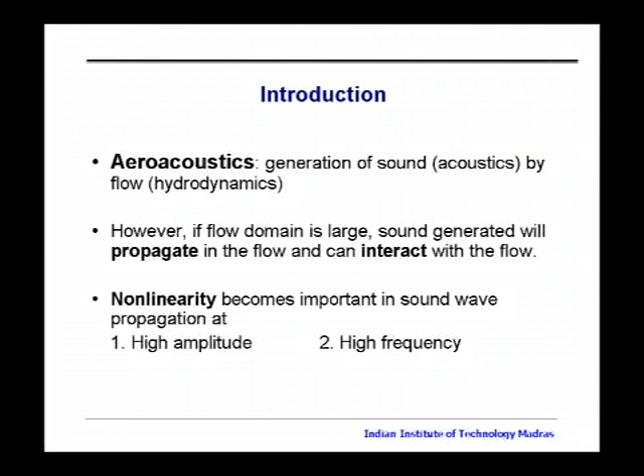Aeroacoustics is the generation of sound by flow hydrodynamics. But if the flow domain is large, and there are problems in which you are interested in what happens in large domains, a sound generated will propagate in the flow. And if there is a flow, it can interact with the flow. Examples of that would be a CD nozzle, or a sonic boom where sound propagates over a very large distance. And nonlinearity becomes important if the sound propagation is happening at high amplitudes and high frequencies.

And my introduction to this phenomenon was somewhat circumstantial. Day one at my graduate school, I learned that you have to hit the ground running, and I was given these microphones, and I learned that they are awfully expensive, much more than my stipend. And day two, I measured these things. I didn't know much about acoustics, and I thought they would look like sine waves, but I got some things which were quite far from sine waves.

And I thought, oh my God, all my assistantship is going to be taken by my professor to replace these microphones. But then I eventually learned that this was really okay, and this was called nonlinear distortion. But I was too busy in graduate school to do anything with it. And so eventually, some 15, 20 years later, I'm revisiting the problem.

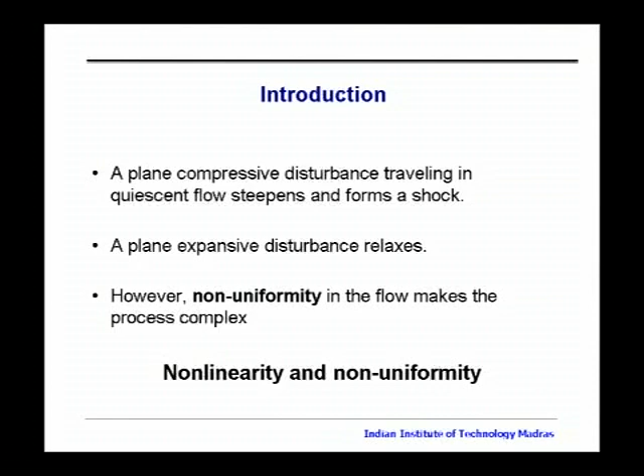So we all know from classical papers that a plane compressive disturbance traveling in a quiescent flow will steepen and form a shock. A plane expansive disturbance would relax. However, there can be non-uniformity in the flow, and this can make the process complex. And so there is this combination of nonlinearity and non-uniformity, and this can make the subject complicated.

So the goals here are to study analytically the nonlinear wave propagation in a general non-uniform flow, and when and where can a compression wave steepen to form into a shock? That's one question I want to ask. And would an expansive disturbance always relax, or would it reach some other state like attaining a permanent form and so on and so forth?

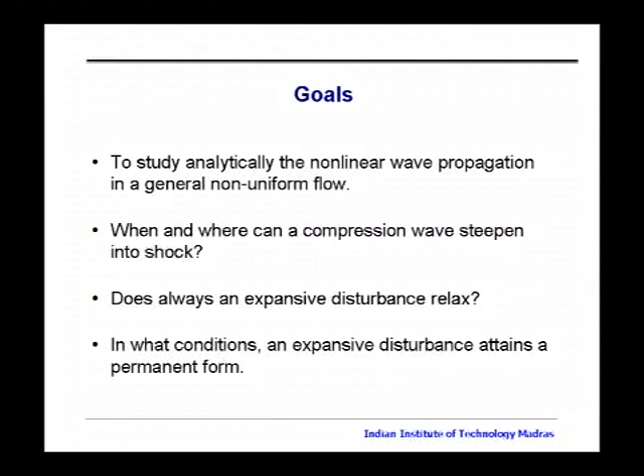Let's just quickly list some of the applications. I got into it because of rocket nozzles and flow in CD nozzles. Other interesting examples are large gas transport systems where you have pipelines carrying gas over kilometers, and you sometimes have oscillations set up because of valves being closed and opened. These pipelines are maintained at very high pressures, so you can actually get high amplitudes, and this can propagate down and become a shock because there are kilometers of pipeline.

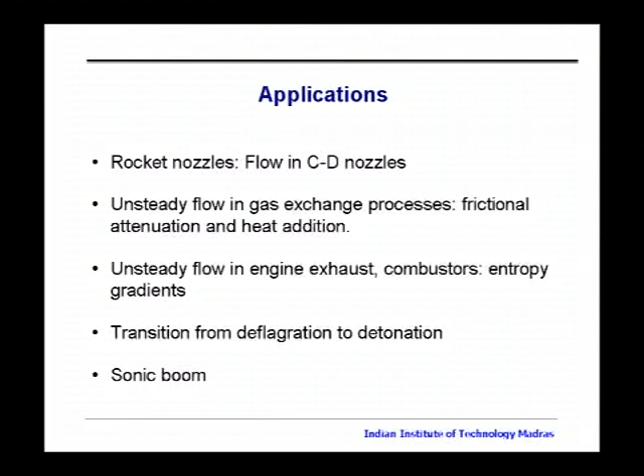And there is, of course, unsteady flow in engine exhaust and combustors, and you can look at transition from deflagration to detonation. Of course, there's the sonic boom which aeroacoustic people are very interested in. So this is indeed a well-posed problem, and someone was saying that Ffowcs Williams likes well-posed problems. But I didn't do the well-posing. It was people like Whitham and Crighton who well-posed the problem.

It's only the Euler equation, a generalized Euler equation where you can think about changes in area or some other inhomogeneities. It's a hyperbolic system, and you can write this equation in this generalized form where u_i is a flow variable, a_ij could in general be a function of u_j, and b_i is a function of u_j and x.

And we all know from classical fluid mechanics that the determinant of a_ij minus c times delta_ij would give the characteristic velocities, which would be u plus a, u minus a, and u in a classical fluid mechanics sense. And b_i could represent things like the effect of duct area variation on the continuity equation, or non-uniform Mach number, or a frictional term in the momentum equation, or sometimes heat addition in the energy equation, and so on.

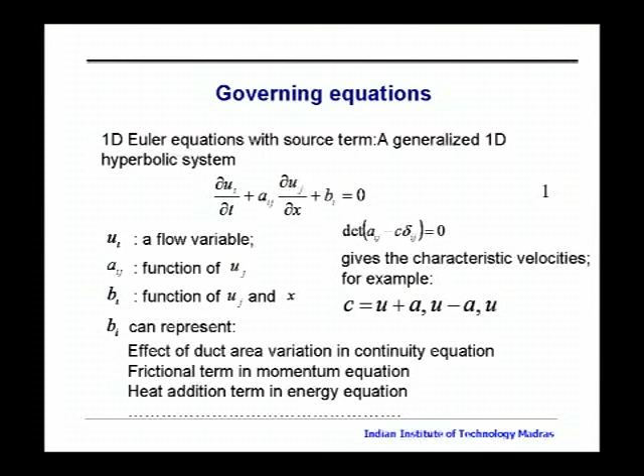So now Whitham and Crighton, they have worked on this problem, but they have done the problem when they had a quiescent or a uniform flow downstream of the wave, which will actually make ui equal to constant, and bi, which is a function of uj, is equal to 0. So then the equation can be solved quite nicely and elegantly, and it is there in some of the papers by Whitham in the 1950s, and there in his textbook, really elegant stuff. But things get messy when bi has to be taken into account when ui is there.

Just some more definitions so that I can explain my talk better. I call a base flow a given steady flow, and in the present work, base flow is the steady state solution of the governing equation. So just the unsteady term disappears, and that's the base flow. Disturbance is at any point in the base flow, if I perturb the flow variable, that's disturbance.

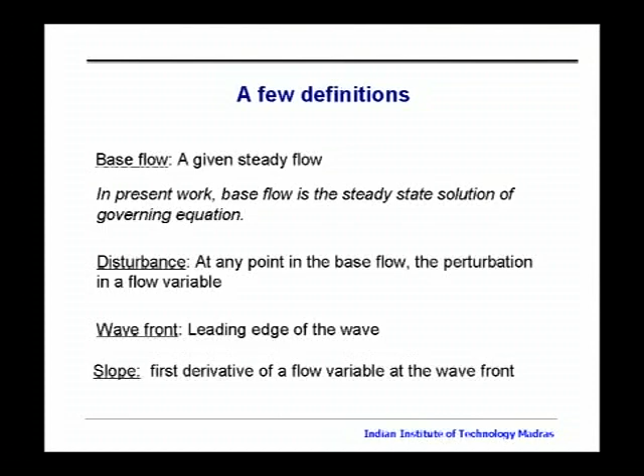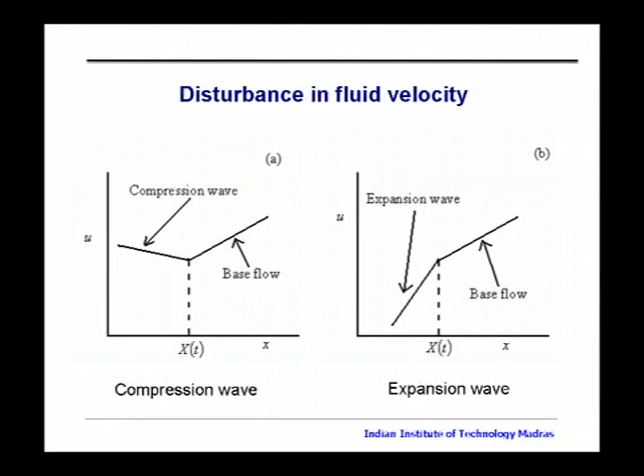Wave front is the leading edge of the wave, and slope is the first derivative of the flow variable at the wave front. So if I have a general flow where I have a base flow whose slope is like this, and then I perturb the slope, first derivative, a little bit, this is how a compression wave would look if I'm looking at a right-running wave, and the expansion wave for a right-running wave would look opposite. It's coming down. So this is just a schematic representation.

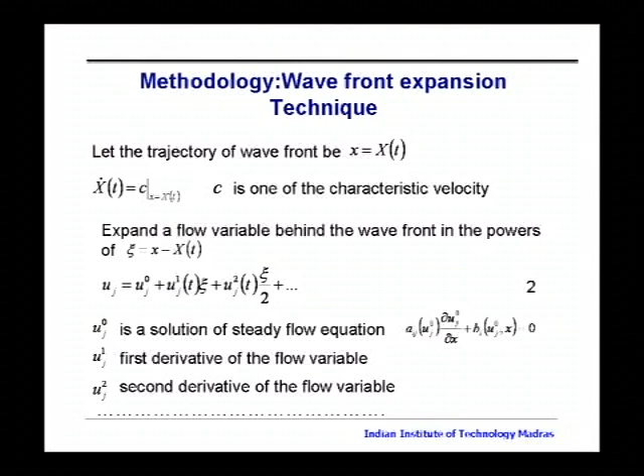So this is like a Taylor series here, and uj0 is a solution of the steady flow equation, which is this. The unsteady term here is missing. uj1 is the first derivative of the flow variable, uj2 is the second derivative of the flow variable, and so on and so forth. So there's a way to look at the derivatives. And now, similarly, we can expand the terms in the equation, aij, this tensor, and bi, in terms of the distance xi from the wavefront.

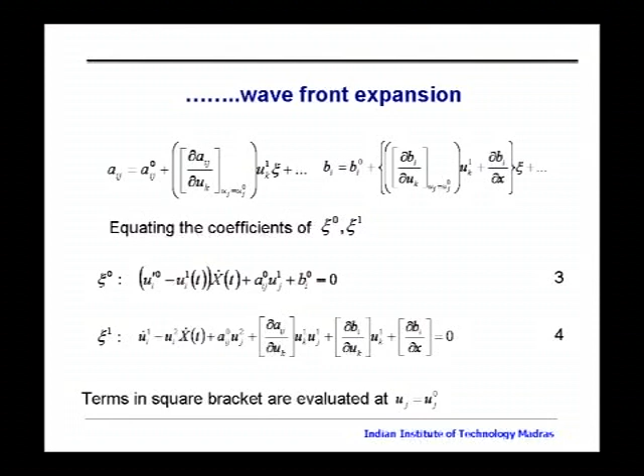And then what we do is to look at the coefficients of xi power 0 and xi power 1, and then you can write these equations. If you write this in expanded form, these equations take long lines, but in tensor form they become sleek and elegant. Now, terms in square brackets mean they're evaluated at the wavefront. So we can write equations like that for xi power 2 and xi power 3 and so on and so forth. And the question is how to solve for the derivatives.

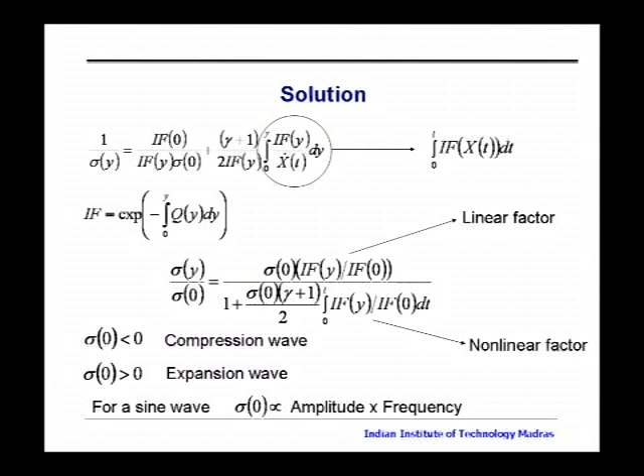So having got the solution, take a look at it with the linear theory one more time. I of y depends on base flow, and sigma y by sigma naught equals I of y by I of naught. This is only when the linear effect is concerned, and these are the solutions in linear acoustics, like ray theory of acoustics. That means the scaling is the same for both compression and expansion waves, and you can work out the expression for I of y. For example, in a variable area duct, it goes like 1 over square root of A of y.

So now we make some definitions. We call the base flow a diverging field if I of y is a decreasing function, and a converging field if I of y is an increasing function. This is just to keep the discussion simple. In a converging field, we can imagine a cone where a disturbance comes through and strengthens, and we can also look at a cone which is opening out, diverging, where a disturbance will decay down.

So based on this intuitive feeling, when I of y is decreasing, that's when attenuation or decay will happen. That will be called a diverging field. And when I of y is increasing, the wave will strengthen and the slope will increase, and it's called a converging field. This is my own definition.

Looking at this expression one more time, we can see that the presence of the integral shows there is a history effect of nonlinearity, which is something you would expect in a nonlinear system. The nonlinearity combines with the linear scaling and makes the process more complex compared to the classical linear acoustic ray theory.

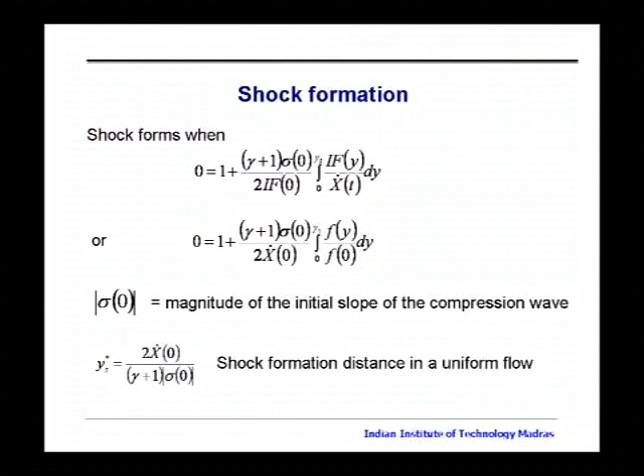And here you can see that I of y is the integration factor divided by x dot, which is the velocity of the wavefront. So we can call I of y divided by x dot as f of y, which is a more appropriate function. I will explain things in terms of that. Now, when does a shock form? I had an expression for sigma, and when the denominator disappears, it blows up.

So that's this equation which I have written, or alternately, you can write it in terms of f as the second equation, and everything is linked to the magnitude of the initial slope of the compression wave. An expansion wave cannot form a shock. Now for comparison purposes, we will look at a classical case where you have a straight duct and a shock forms in a uniform flow.

Then you can integrate this; f of y is the same as f0, so you can get y star, the shock formation distance in a uniform flow, as 2 x dot over gamma plus 1 sigma naught. This is the formula which is in all the old gas dynamics textbooks.

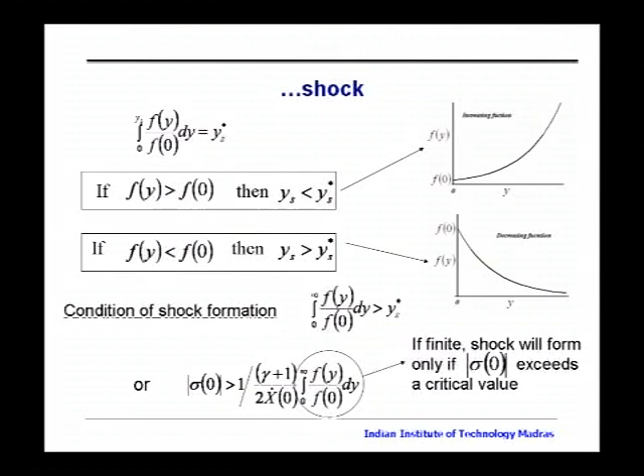So now we have this expression for a general case: the integral from 0 to y of f of y over f0 dy is y star. This gives an implicit equation for the formation of a shock, which can easily be worked out. Now, we look at two kinds of f of y: where f of y is increasing or f of y is decreasing.

When f of y is increasing, then it will turn out that from this we can show that if f of y is greater than f of 0 (actually it's enough if the average value is greater), then ys is less than ys star. This means shock formation will be early, or you would end up favoring the shock formation compared to the case when you have a straight duct with constant properties. Whereas when you have a decreasing function f of y, then the shock formation would be delayed, or ys is greater than ys star.

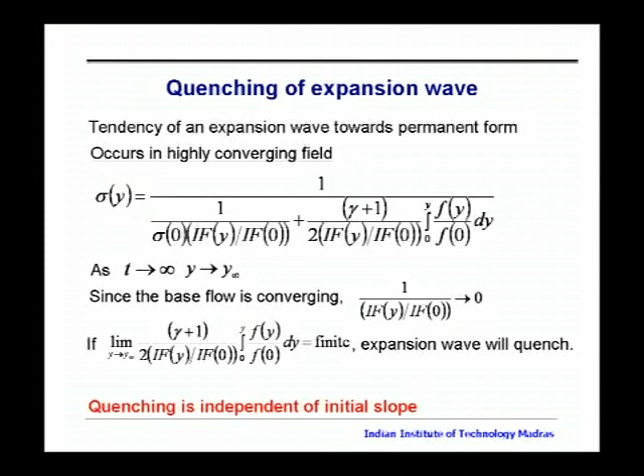Now, you can also get a condition for shock formation, that is, if you let the flow go to infinity, hypothetically, even then the shock forms. So you can derive this expression, which says that a compressive disturbance should always have a value greater than this simple integral written here. So you have to have the sigma exceed a critical value. Only then shock will form.

Okay. The other interesting thing, which is not much talked about, is quenching of an expansion wave, which is a tendency of an expansion wave to move towards a permanent form, and this occurs in a highly converging field. I have rewritten the same expression which I had. If I have a highly converging field where this 1 over I of y tends to 0, so that this first term goes to 0, then we can take a look at the second expression, and it is possible that this limit is finite. Then your expansion waves, as they approach this limit, can reach a constant strength. This phenomenon is defined as quenching, and it should happen independent of the initial slope.

Now, you can evaluate the above limit. What I want to say is, if I of y grows faster than I prime of y, that's what the limit ends up to be, then the wave will relax. But if you have an integrating factor I of y which goes as fast as the first derivative, like a function e power x, then you will have quenching, because this limit will be finite. That means no matter what disturbance strength you start with, they will all reach a constant value. This has been reported by Clarke in the context of waves in combusting systems, and it can get into a shock if I of y is lower than I prime of y. However, we know that an expansion shock is mechanically unstable.

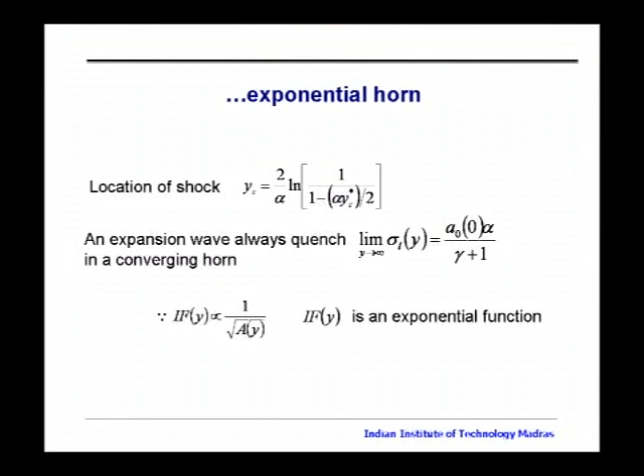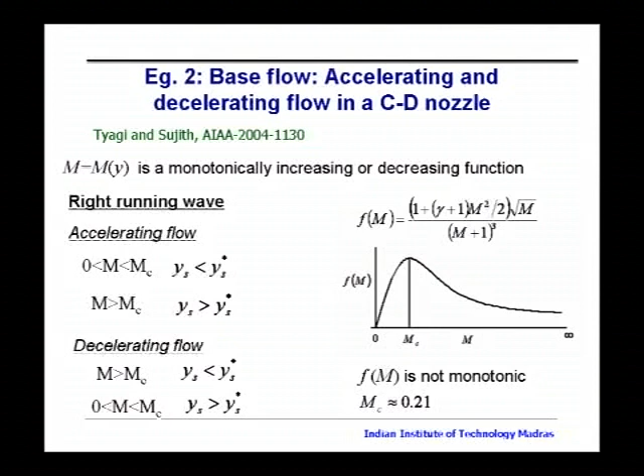So just look at some examples. We look at an exponential horn, and in a converging horn, you can show that every compression wave will steepen into a shock if you use the criteria. In a diverging horn, which means alpha is greater than 0, shock will form if the initial disturbance is greater than this simple number. Like that, you can work out whatever cases you have. You can derive a simple expression for the location of shock formation. Here is the location of shock formation. And we can also see this interesting case of quenching in an exponential horn. An expansion wave will always quench in a converging horn and attain this limiting disturbance strength, and it doesn't die down.

So we look at the case of a CD nozzle with a base flow, and first look at a right-running wave in accelerating flow. This is the plot of f of M. There is a critical point MC which is around 0.21, and because f of M is not a monotonic function, it will go up and come down. If you look at shock formation where the Mach number is between 0 and MC, as f of M is increasing, ys becomes less than ys star, which is the classical shock formation distance in a straight duct with constant Mach number. And when M is on the other side, you will have ys greater than ys star. That means the shock will take more time to evolve.

This can be physically seen because at very low Mach numbers, you need a converging duct to accelerate the base flow. But as you do this, the disturbance will just converge and strengthen. But what will happen after 0.21? The base flow is accelerating, so the front part of the wave will try to run away from the back part.

So this is a physical explanation. So now that effect becomes more prominent, and then the shock formation distance will start increasing, or the shock formation is delayed here. And in the decelerating flow, the reverse happens, and you come from this side, from right to left, and M is greater than Mc. Ys is less than ys star, and on this part, ys, the shock formation distance, is greater than ys star.

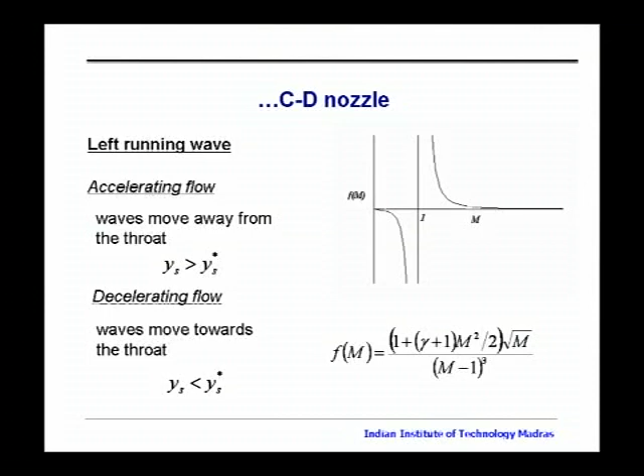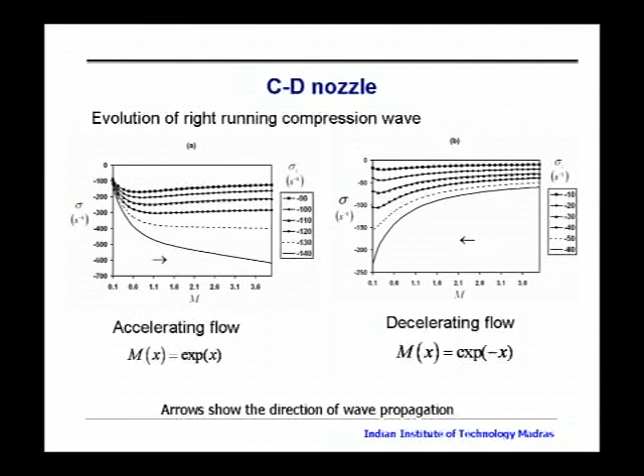Now, you look at a decelerating flow, the values which are required to become a shock are much smaller. That means decelerating flow has a tendency to have shock formation faster. And this is the reason you have seen that in some of the missile intakes you have problems; shocks appear very easily and so on.

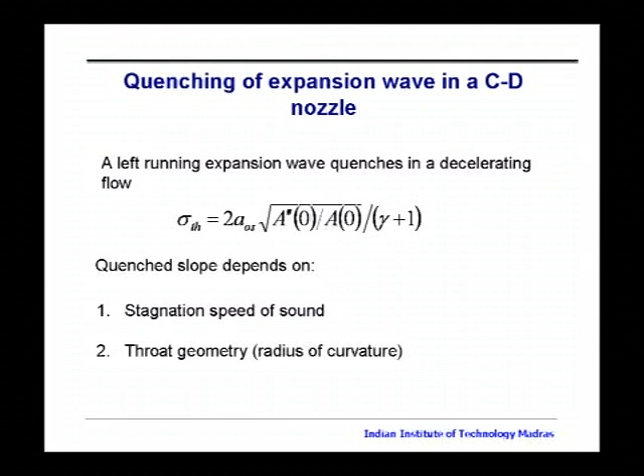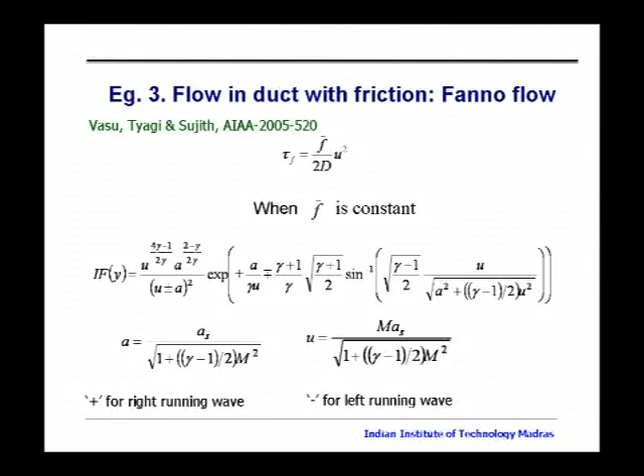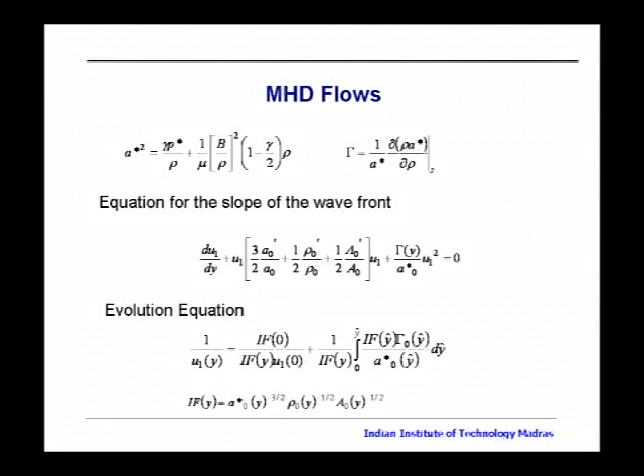The same analysis can be used for looking at MHD flows. I have similarly derived the equation for evolution of the wave when there's a perfectly conducting fluid where the speed of sound has a component from the magnetic pressure, and you can again get a simple equation for the evolution of the slope. So I conclude here by saying that we studied nonlinear propagation analytically. Why analytically? Because I didn't want to do numerics.

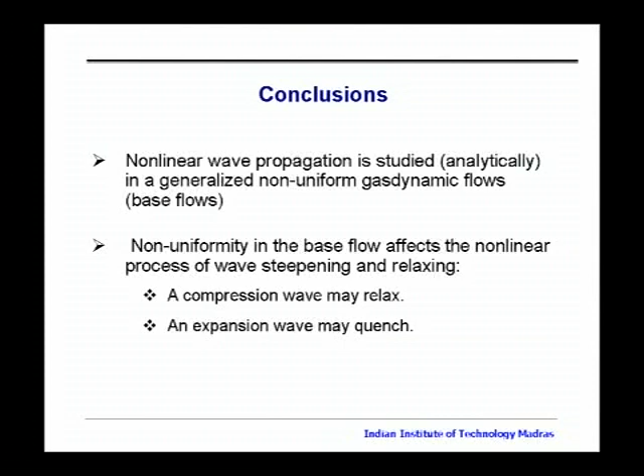In generalized non-uniform gas dynamic flows, non-uniformity in the base flow affects the nonlinear process of wave steepening and relaxing. A compression wave may relax and an expansion wave may quench in the classical system. Of course, the reverse results in the case of negative nonlinearity. In a non-uniform flow, nonlinear distortion depends on the direction of wave propagation, on whether the base flow is accelerating or decelerating, and also on whether it is subsonic or supersonic flow.